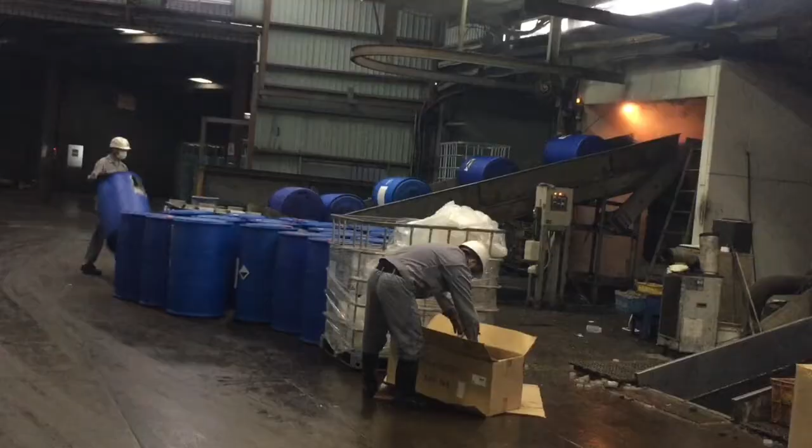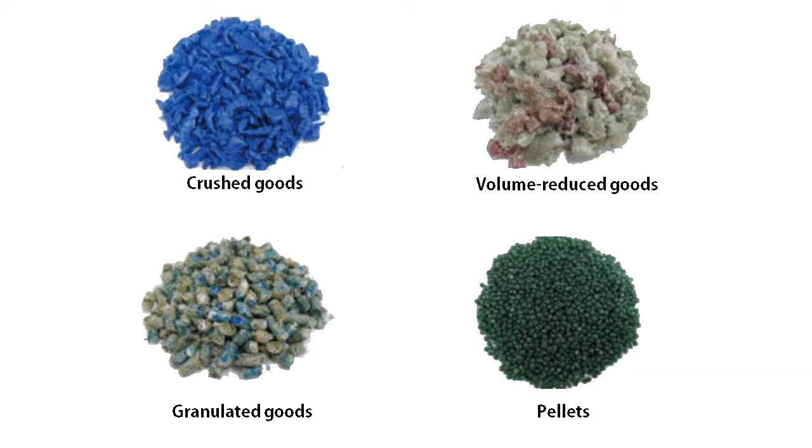In this video, I will show you the recycling of polyethylene, one of the easiest plastic materials to process, and polypropylene, used for many applications including the familiar caps of PET plastic bottles. We at Kawase Industry ship out our recycled plastic products in 4 different types: crushed goods, volume-reduced goods, granulated goods, and pellets. Today, we will look at the production line of crushed goods recycled plastics.

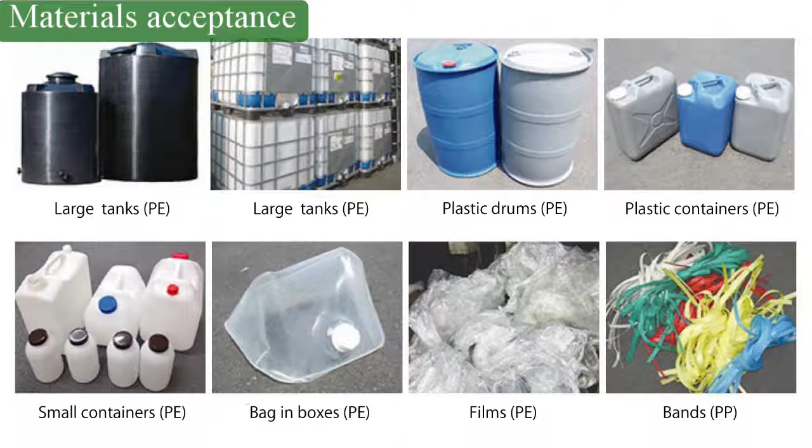This plant mainly accepts plastic containers, drums, shipping containers, and pallets. The waste is transported in trucks like this. When a shipment of waste is to be newly received, the contents must be checked. We have the supplier present to us a safety data sheet to make sure that it is okay for us to accept it into the plant. When confirmed, we start receiving the cargo.

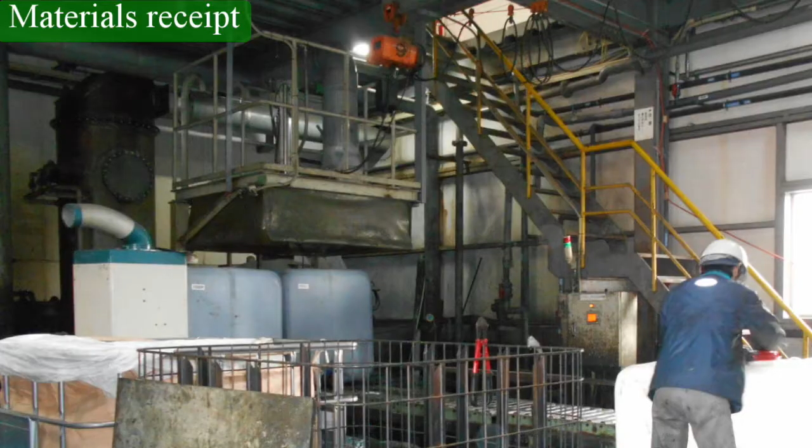Even if there is no problem with the declared contents, we check the delivered waste to see whether it has a strong odor or some other secondary characteristics. We have a company-to-company contract as to the content of the waste we can receive. Some waste cargo may be found unacceptable because of its contents. In such an event, we ask the client to remove the unacceptable substances. Waste of different identity is occasionally brought in. For this reason, we make it a rule to confirm the labeling before we accept the waste.

Recently, companies are more environmentally aware about the waste they discharge. We now have fewer incidents of waste being contaminated by undeclared substances. A loaded truck is weighed on this truck scale, or weighbridge. The truck is weighed again after unloading, and the calculated difference is the weight of the cargo.

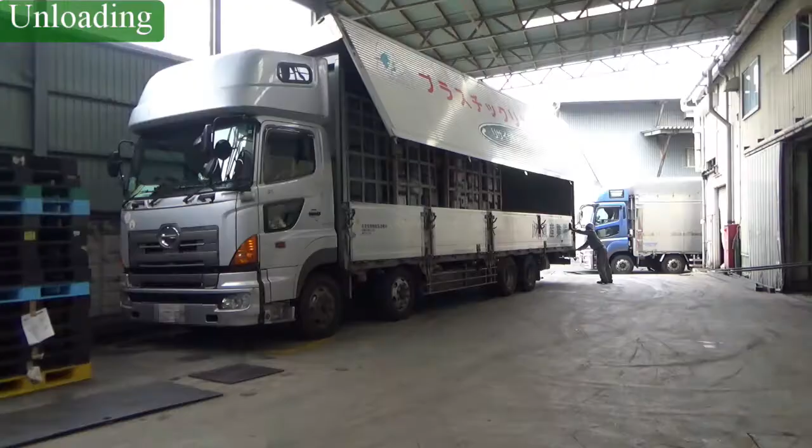Now, the delivered waste is unloaded by a lift. In principle, the used plastics arrive in steel baskets. Big plastic articles may be received as they are. In this way, waste plastic containers arrive in baskets.

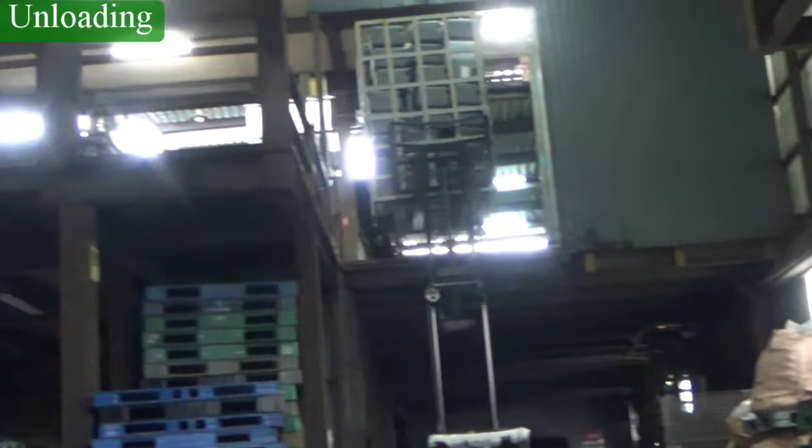Each day, 10 to 20 large trucks bring in waste. Normally, one truck carries 1 to 2 tons of load, so a maximum of 40 tons of used plastics is brought in. Every month, we receive about 1,000 tons of waste plastic materials containing polyethylene or polypropylene generated by business operators. The waste plastics are piled up this way.

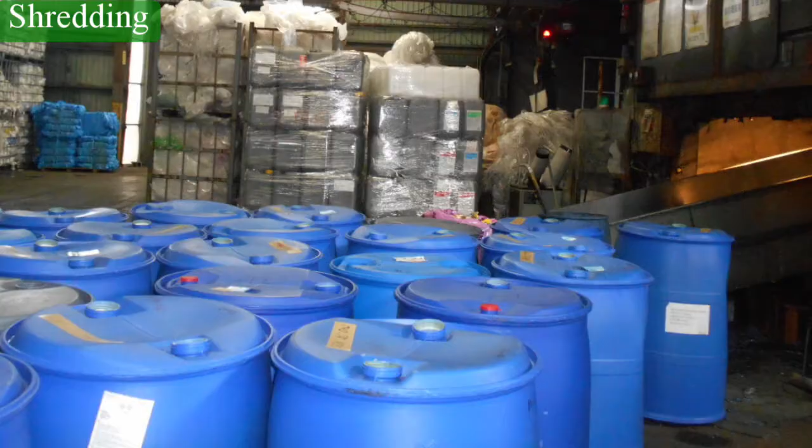We put the waste plastics into the shredding machine. We use different lines for different types of waste. Used plastic containers have traces of a large variety of contents, but they have been sorted out already to some extent by the discharging business operator. In this recycling line, a large blue plastic drum is shredded.

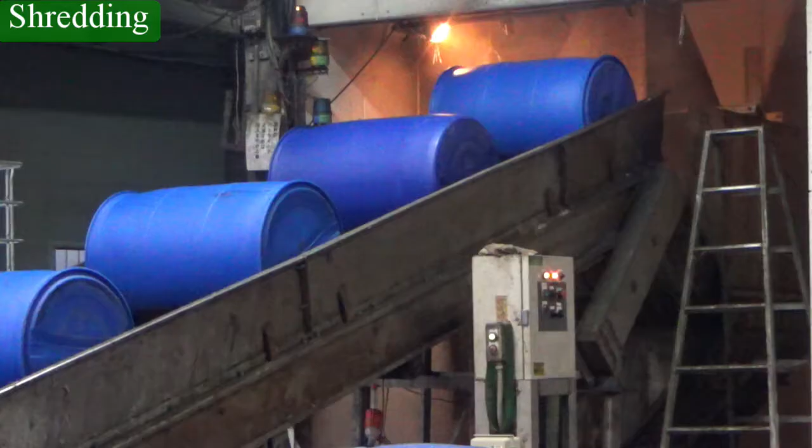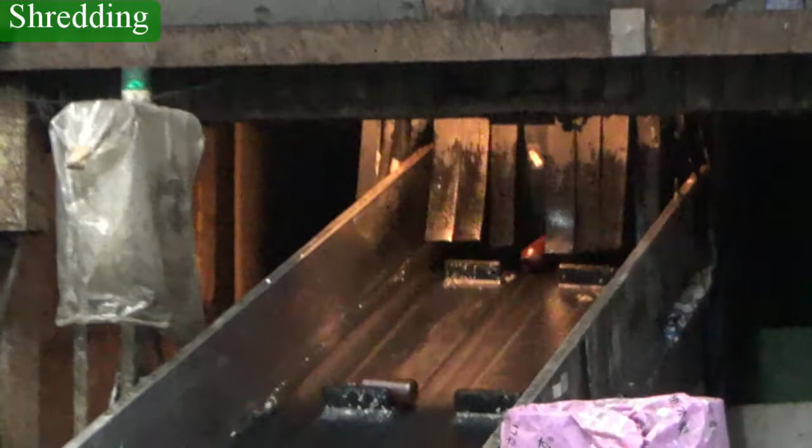Here, small containers in cardboard boxes are shredded. As you can see, our production staff are working diligently in this noisy environment.

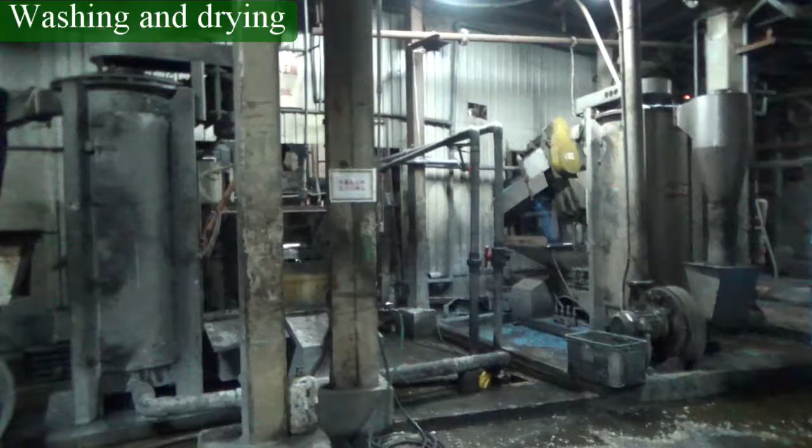This is where we wash the shredded materials. The shredded plastics go through the washing tank to be washed. Then they are dewatered by the dewatering machine and transferred through a pipe by an air blower, to be collected

in each line. Dewatering alone still leaves some water on the surface of the plastics, but they get dry while being transferred by the blower air. By the time they are ready for packing, they are completely dry.

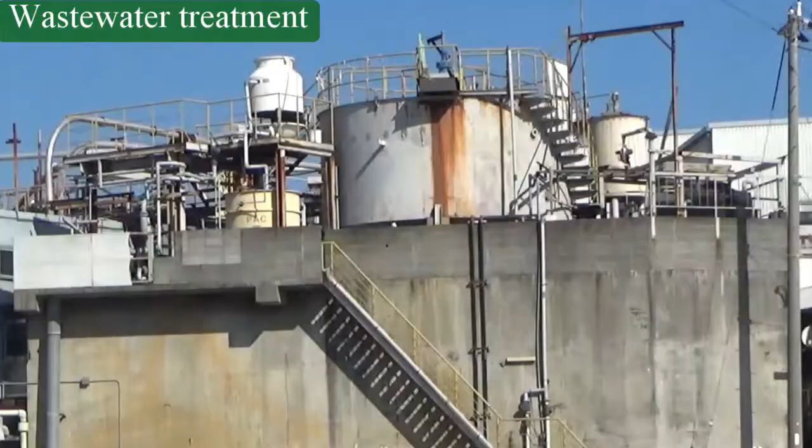A large amount of water is used in this plant to wash plastics. We operate specially designed wastewater treatment facilities that can treat about 400 tons of wastewater a day. One-time use of water would be extremely wasteful and damaging to conservation of water resources. We have constructed a water circulation system in the plant that allows repeated use of water through treatment.

Basically, the water once used and returned goes through chemical treatment. It is neutralized by adding acid when too alkaline and vice versa. It is returned for reuse after sludge removal.

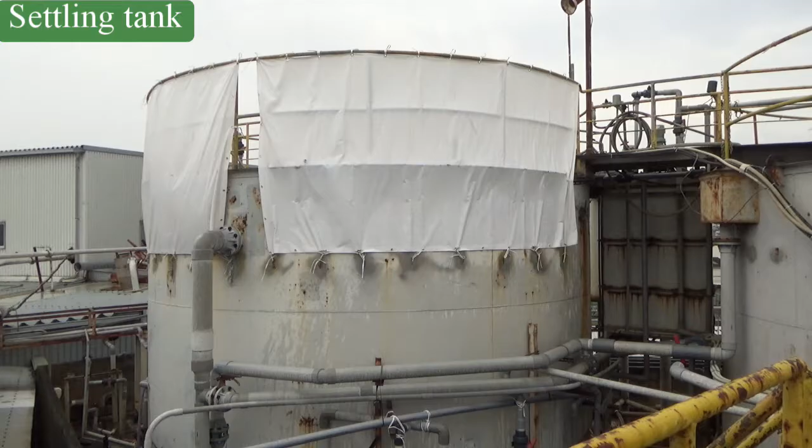This is the equipment to remove sludge. These two large tanks are the first and the second settling tanks. Water that passes through these two tanks is reused as clean water. The sludge settles down at the bottom and the supernatant water is reused.

The bottom sludge is dewatered by a filter press. The dewatered sludge is collected into a container and used as material for asphalt paving.

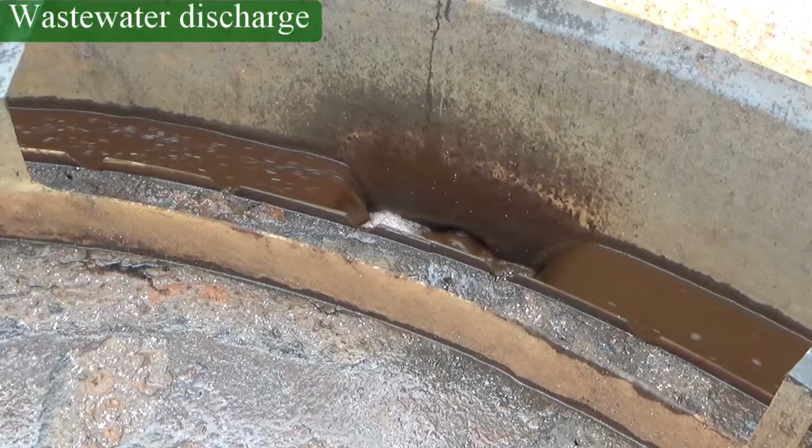While we recirculate water by our in-house wastewater treatment facilities in principle, we need to add some amount of fresh industrial-grade water from outside. The resulting excess water is discharged to public sewers, after confirming compliance with the local regulatory

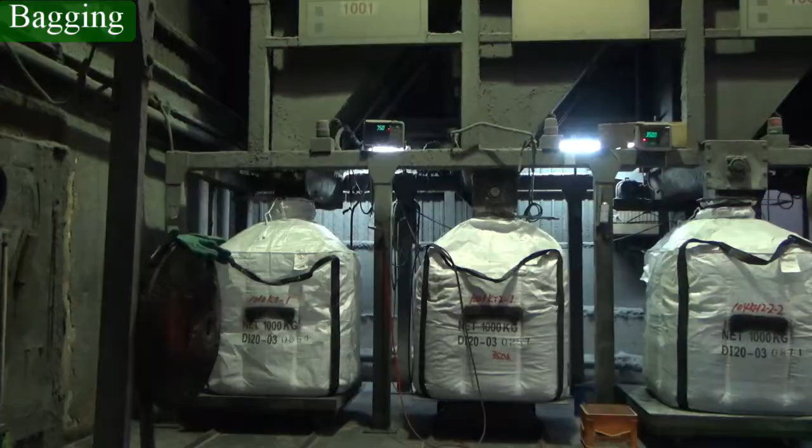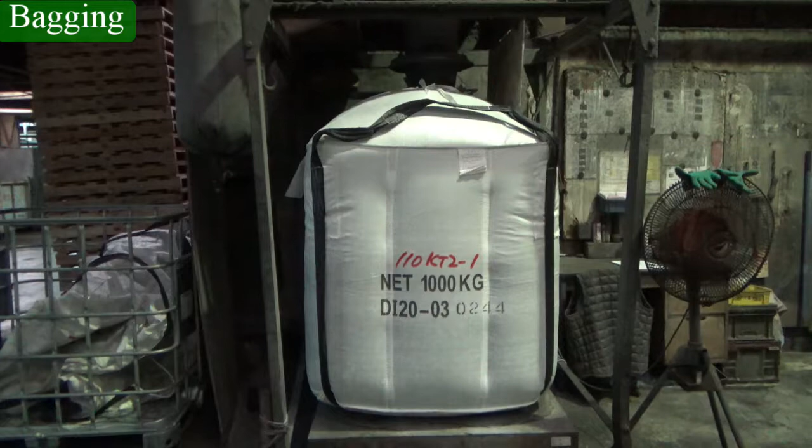standards. Here, the shredded plastics treated in their respective lines are bagged into white bags. The bags are replaced every time the content reaches 1000 kilograms. The shredded plastics are shipped out as raw material for new plastic products.

This is our final product made from shredded waste plastics. They have been changed to fine chips. Since they have been thoroughly washed, they are crisp and not sticky.

This is the stockyard. The bagged plastic products are stored by type. One bag contains 1000 kilograms. So this pile with 2 layers of pallets represents about 1 ton of product.

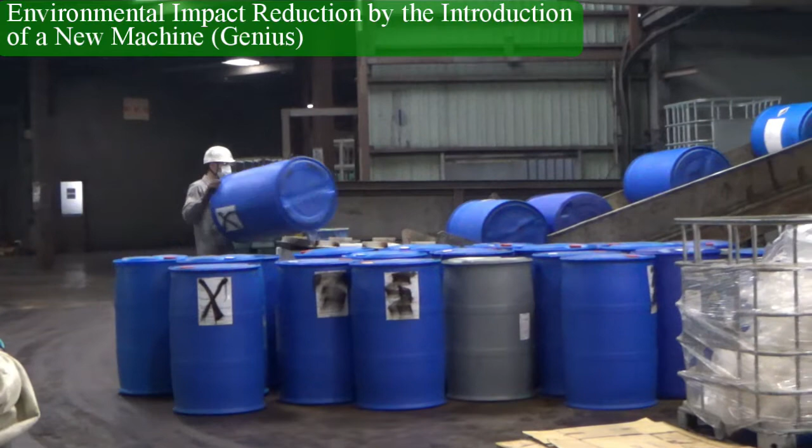We used to make compacted products from waste film and other flexible plastics by first shredding them, and then melting them by adding heat to obtain blocks of some 10 centimeters in size. Then we cooled the blocks with water, exposed them again to just enough heat to let water evaporate, and finally shredded them into granules as final product. It required much labor and incurred high energy costs.

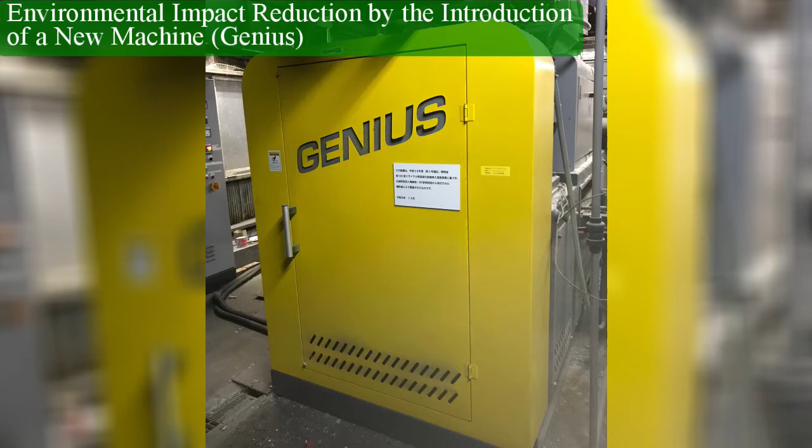Currently, we use a new machine called a squeeze dryer which we bought with 50% government subsidy. First, the waste plastics are shredded and then melted by frictional heat. Then, they are squeezed to remove wetness.

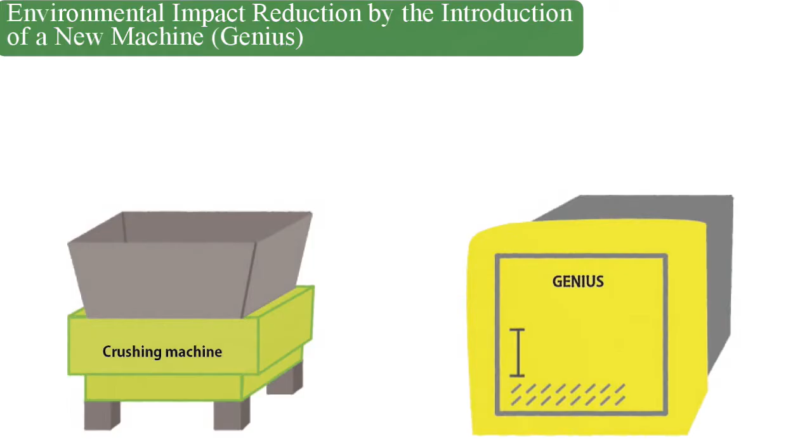Finally, they are extruded out of the small hole at the tip of the machine and are cut into pellets. The process is shorter than before. The conventional shredding machine consumed a large amount of electric power, but this new machine requires much less.

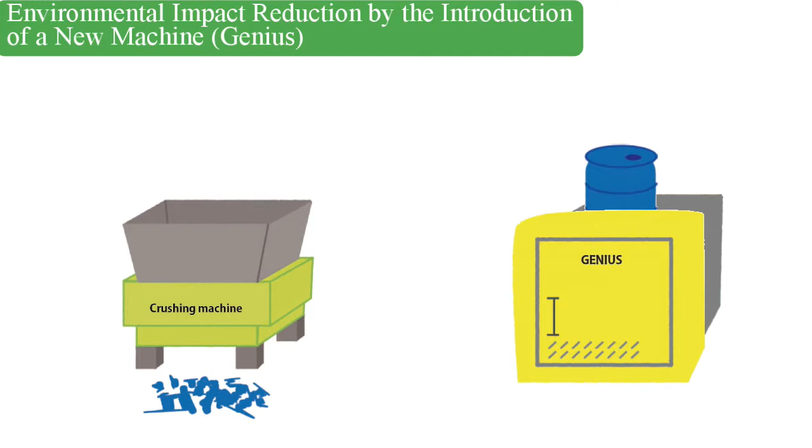For use as the base material for polyethylene or polypropylene plastic products, we produce the raw materials for recycled plastic products by solidifying waste plastics, after shredding and heating, as well as using the additional process step of pelletizing. Kawase Industry is

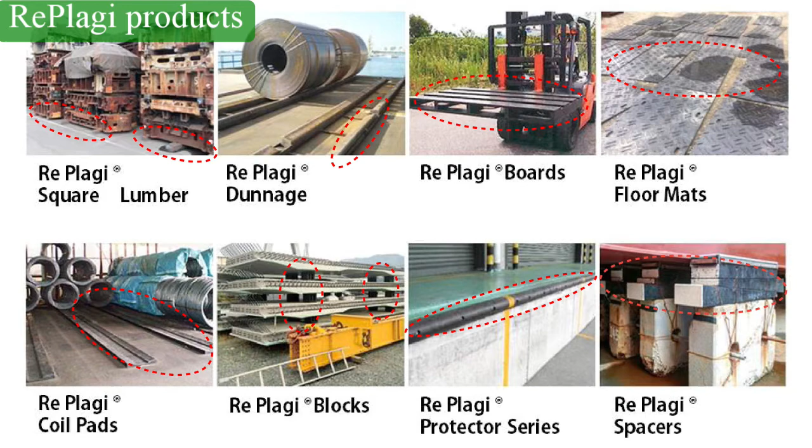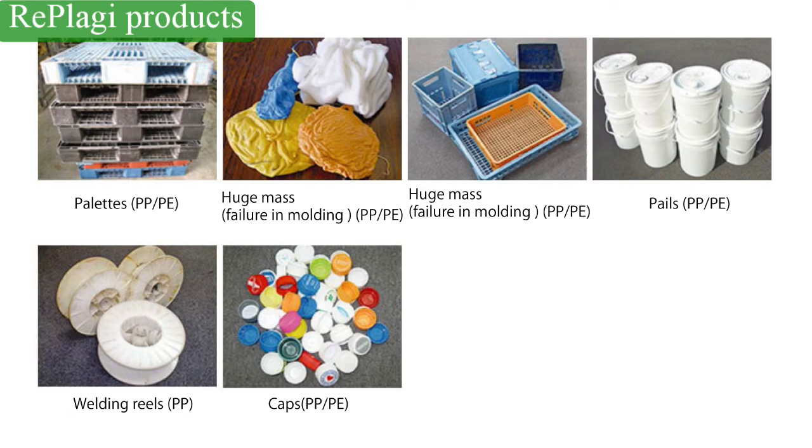also a manufacturer of 100% material recycled products, known by the trademark of RePlagi, using waste plastics as the starting raw materials. Because RePlagi products are made of polypropylene and polyethylene, they are free of hazardous substances and can be recycled even if damaged. These are some examples of RePlagi products.

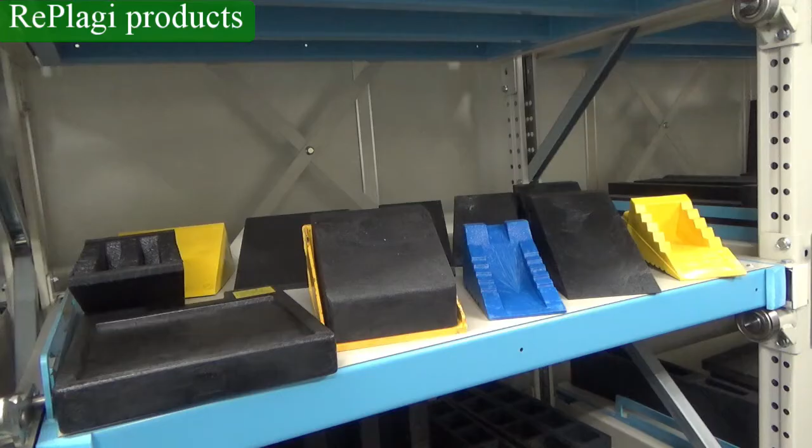They come in various shapes. Some are colorful, but basically black is the standard color. We produce blue, yellow, or other single color products by using paints or the color of the base material before molding only, when the color black is not good for the required visibility or appearance in the intended application.

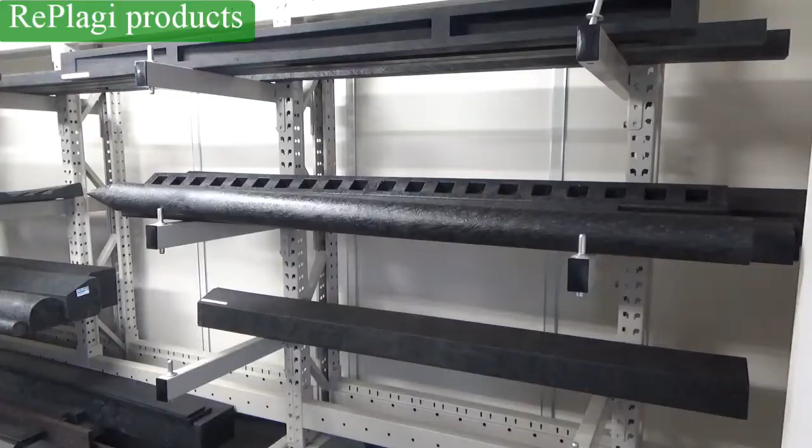Because they are plastic, we can produce various products easily so long as the mold is available. We are working to identify user needs and develop products accordingly, to offer better products that are easier to use.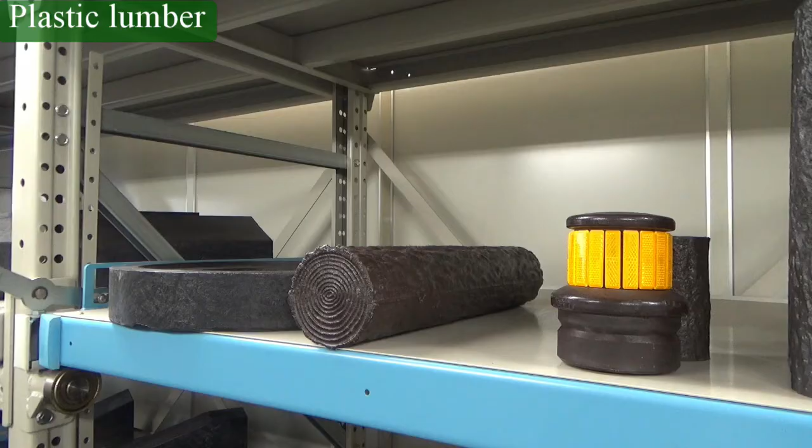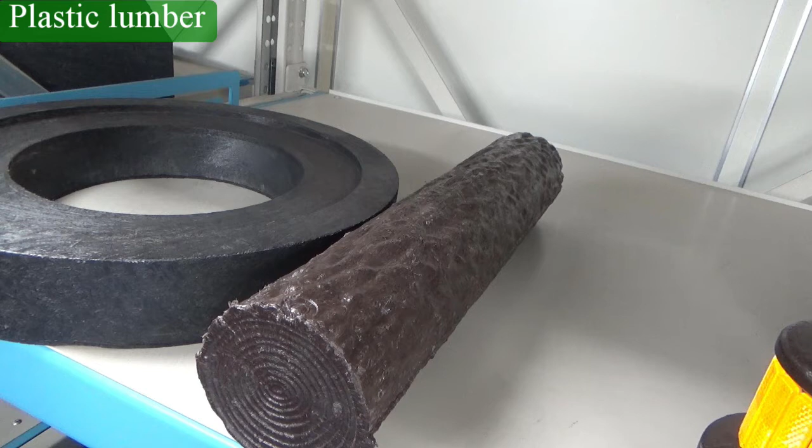These products are made as replacement for wooden products. They are made to look like wood. The surface is molded in such a way as to add the uneven texture. The major use application is sleepers to support very heavy objects.

This mat is used to reinforce the soft soil ground. It was originally used as a substitute for iron plates and the like, but because the plastic mat is light and inexpensive, demand is increasing, especially among farmers.

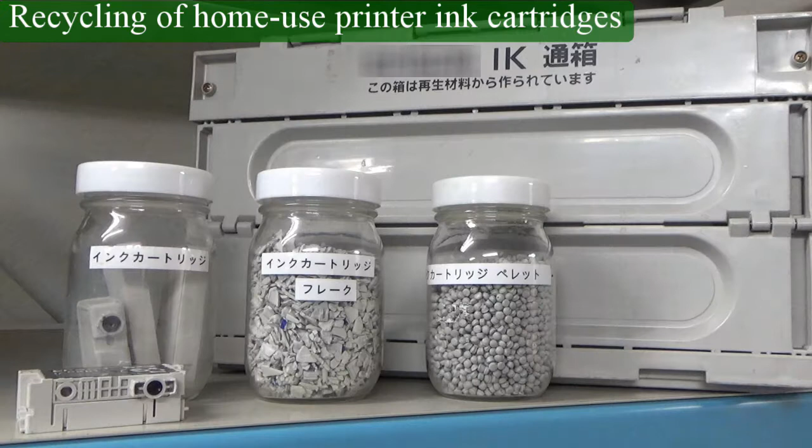We also recycle home-use printer ink cartridges. The substrate of ink cartridges is made of materials other than plastic, but the outer part is made of polypropylene, which we can accept. The recycling process involves shredding and is basically the same as that for ordinary containers.

The shredded ink cartridge is free of non-plastic materials. The substrate and other inside parts have been removed beforehand.

These flakes are then further processed into pellets of about 5 mm in length, making it easier for molding of recycled plastics. These pellets are reused as raw materials for plastic boxes.

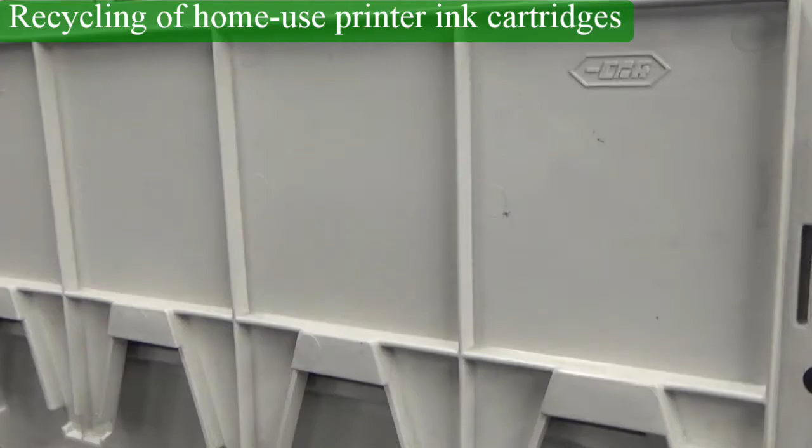Because it is a recycled product, there are traces of ink cartridge labels on the surface. This is indeed evidence that the product is made by material recycling.

As part of our social contribution activities, we welcome local elementary school students for a plant tour and JICA training participants from overseas.

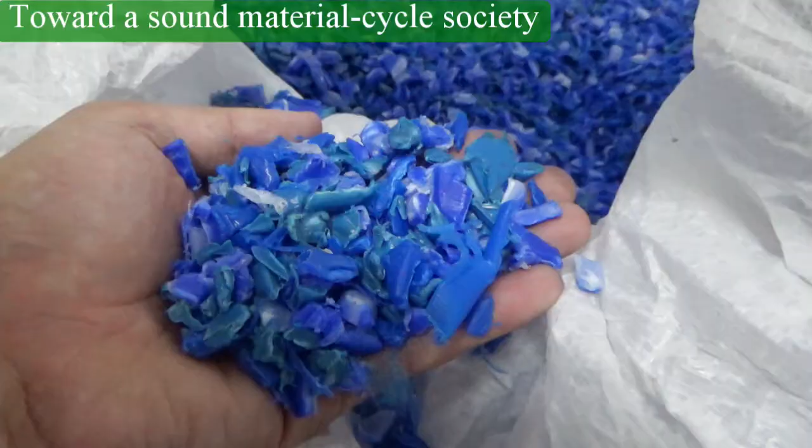Plastic recycling is still a young industry. We should once again remind ourselves that after-use plastics are useful resources, not waste. The first step toward creation of a sound material cycle society is sorted collection of waste. Let us work together to recycle waste into products and create a sound material cycle society.